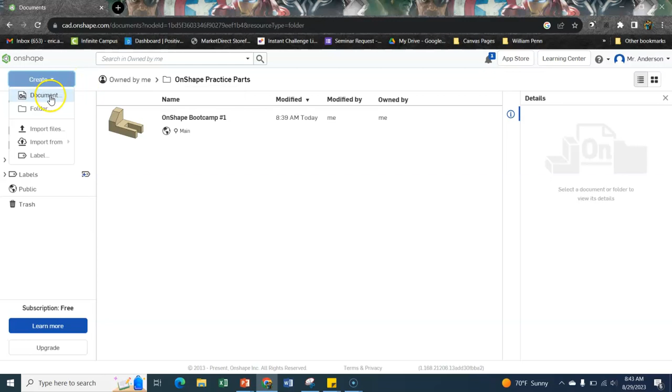I'm going to go up to Create again, Document. Notice I'm in my OnShape practice parts. I'm going to name this OnShape Bootcamp number 2. Create public document. All right, here we go.

One big difference between part 1 and part 2 is part 2 is actually in centimeters, which is a big problem when we get to our calculations. So to change that, we're going to go up to the 3 lines by your title and home button, and change our workspace units from inches to centimeters so that all of our calculations are in metric like we want them to be.

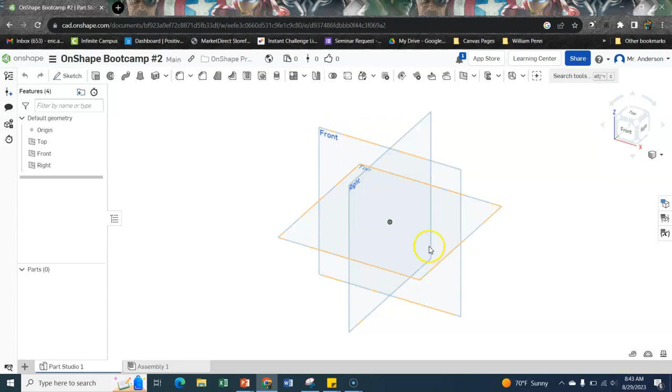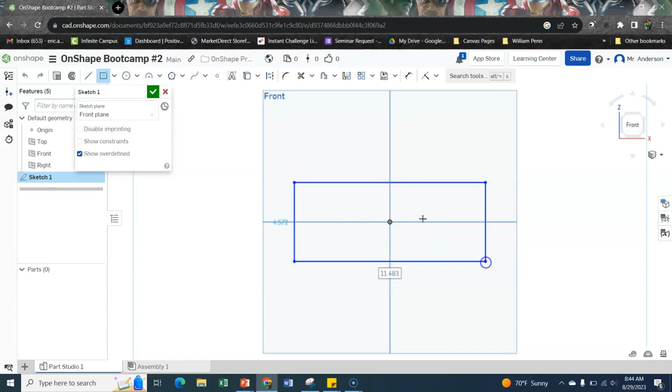Okay, let's do this one a little bit differently. I'm actually going to start from the front plane. I'm going to push it back the other direction just to give you a different view of how to construct some of these things. I'll click on that plane, go to Sketch, and just do the bottom piece for right now. I might switch to a center point rectangle because I really like to be at the origin whenever I'm doing this, and I'll create my rectangle.

I'm going to dimension it. We have 2 boxes at 2 centimeters each, so this is 4 centimeters. And then we have, 2, 4, 6, 8 at 2 centimeters each, so that's going to be 16 centimeters wide.

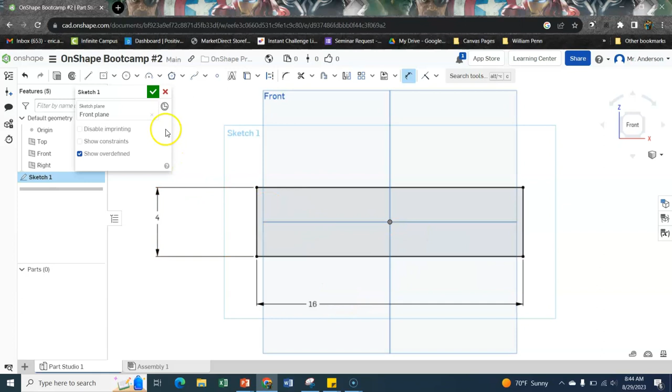Cool, looks good. Let's go to my ISO view and extrude this. Now, one sneaky thing I can do is instead of having it push to the left or push to the right, I can have it push both ways. I really like this when I can stay on the center point, so I'm going to click symmetric, so it pushes both ways in the way that I want it to go.

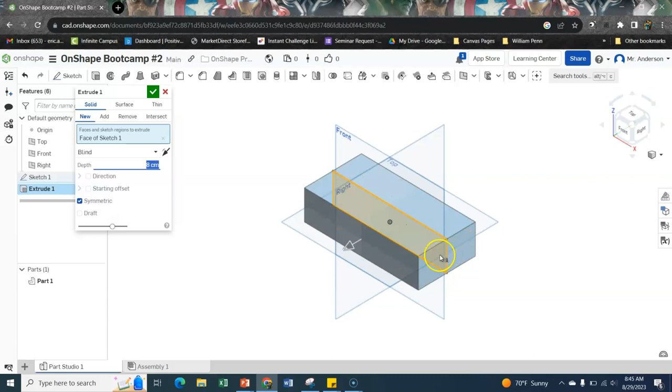We have a total width of 4 squares at 2 centimeters each, so we have 8 centimeters total. Let's make sure that looks okay. That looks good, and we're going to hit the check mark and we are set.

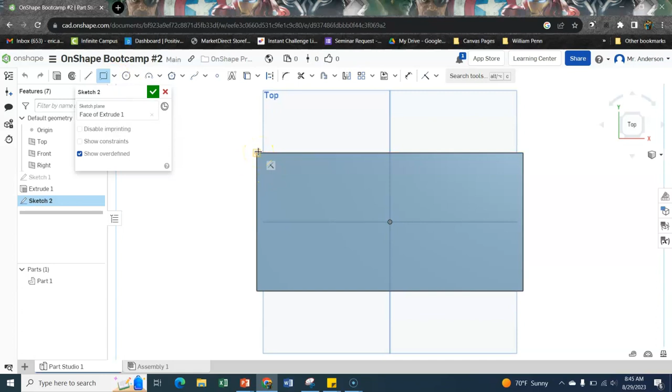All right, let's make the second level of our piece. I'm going to click on the face, hit sketch, go to top so I can see it, and let's go corner rectangle. I'm going to lock it into this corner, just draw it. I don't want to latch it on there quite yet, so I'll just stick it there so it doesn't latch on.

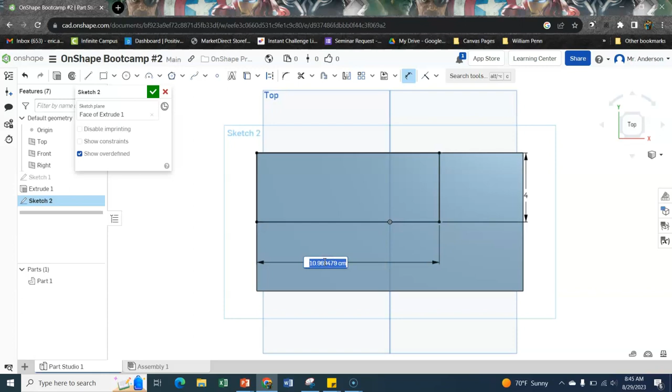We have 2 boxes at 2 centimeters each, just 4 centimeters. This is, 2, 4, 6, 8, 10 centimeters, so 5 boxes. Okay, that looks pretty good. Once again, go back to my isometric view. I'm going to extrude. It looks like we have 6 centimeters up. And we're going to say, okay, cool.

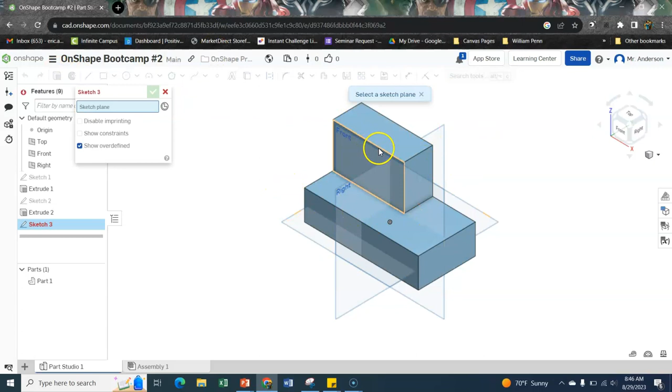Let's start chopping into this stuff. So let's make a sketch, not on the front plane, but on this face right there. Oh, I don't know if I grabbed it. There we go. I'm going to go to front so I can see a little bit easier. And just like we did before, let's do our little triangle. I'm going to go here and here, trying not to lock onto any part so I can dimension it.

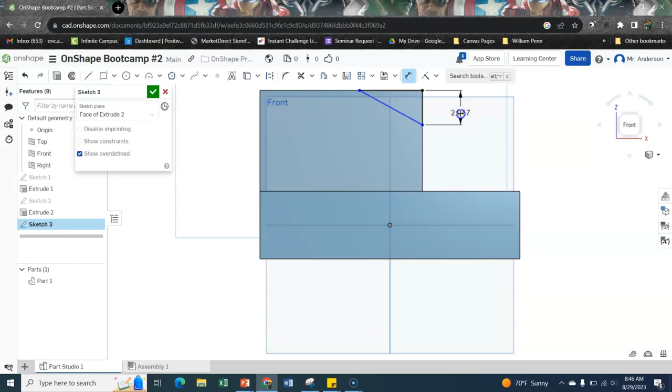It looks like it goes, this is confusing, 4 centimeters tall. I'm going to move this down a little bit. And we have 2 centimeters wide, or excuse me, 4 centimeters, 2 boxes. Okay, that looks pretty good.

Once again, go to isometric. We're going to extrude, now we're going to extrude remove. And I'm going to go from blind to through all, so if I mess up, I can always go back and change some stuff.

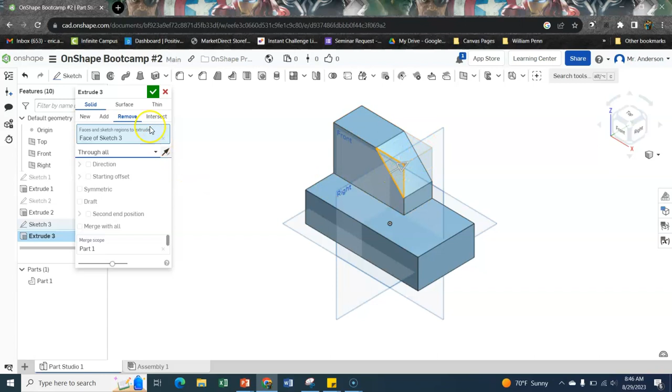Then our last one, we're going to take this chunk out of the block in the corner. I'm going to click on my face that I want to start drawing on, hit sketch, hit top, and let's do our triangle one more time. I'm just going to draw it out, don't really care how big it is, as long as I'm not locking on stuff.

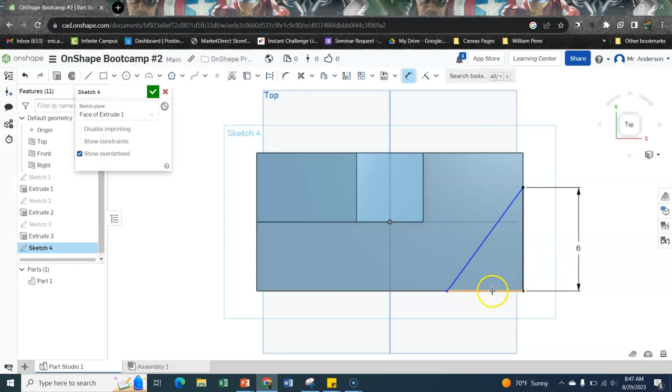I'm going to go dimension. Looks like we are going, 1, 2, 3 boxes, so 6 centimeters. Let me plant that over here. Nice, that looks good. And then we're going 1, 2, 3, another 6 centimeters in that direction. Sweet.

Isometric, extrude, remove. Let's switch it to through so it goes all the way through no matter what. Cool. All right, we got our shape.

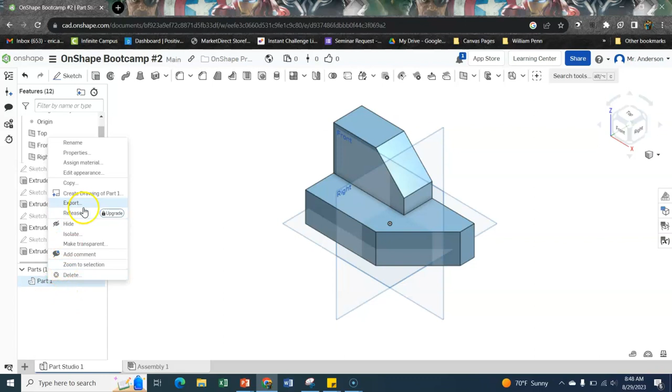Now let's mess with our properties. So we know that it is cast iron. Oh boy, that's a heavy, heavy thing. Cast iron is like what Dutch ovens are made of. Sometimes really heavy irons that you weld with, sometimes use that too. So let's assign the material.

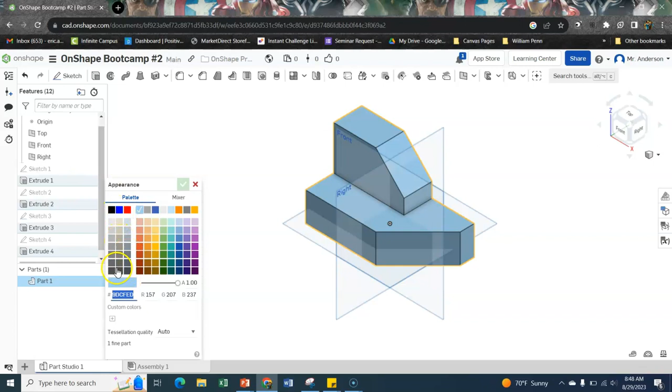Cast iron. There we go. Cast iron is some heavy, heavy stuff, and it's kind of like that brownish black color. So let's change our appearance to, it doesn't have to be exact, but let's get kind of close-ish. That feels kind of cast irony.

Okay, and so then remember, in order to turn this stuff in, let's hide some of the stuff just so it looks a little bit more pretty. What did I do? Oh, I kept the top one on there. I'm going to shift this over just so it's closer to my name.

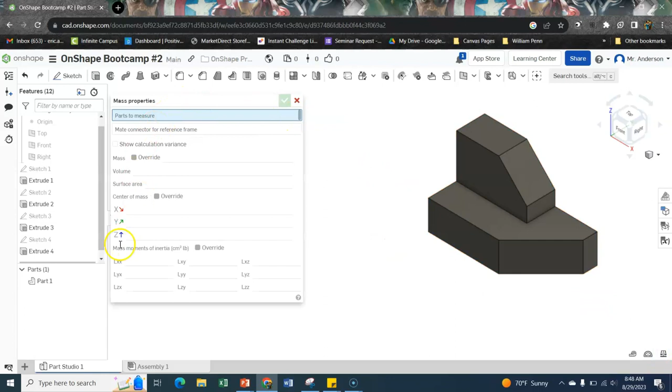And so we have our mass properties. Tell it to measure part number 1. So there's our mass and volume and surface area and stuff like that. You can use your snipping tool to cut that out, and then use your snipping tool. Probably don't want it to be yellow, so I'm going to unselect it. Snipping tool to grab this part plus your name, and you're good to go.